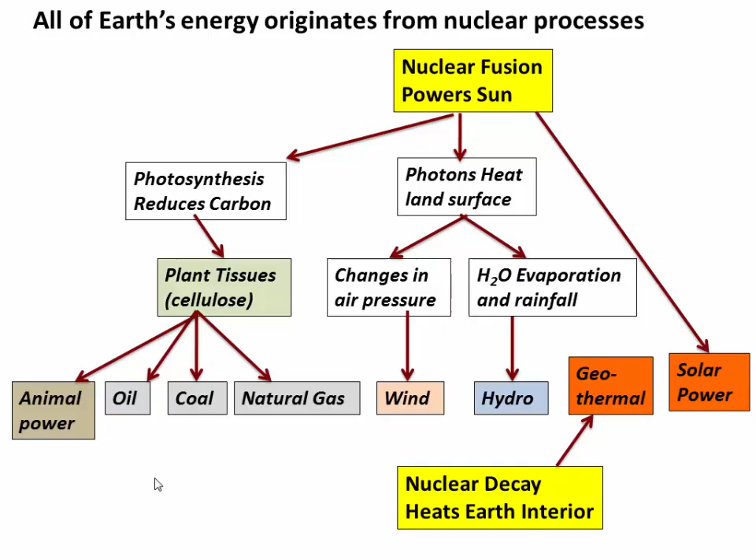So why not just harvest nuclear energy directly? Centuries of scientific research have given us the ability to make electricity directly from nuclear decay and nuclear fission. So why aren't we doing more of this? Well, let's look at the risks and the benefits. We'll go with risks first.

The big one is nuclear meltdowns, like the one that happened at Fukushima Daiichi in Japan in 2011. These meltdowns have the potential to spread radioactive elements around a large area and can be very difficult to clean up. In fact, Fukushima still hasn't been entirely cleaned up 7 years later. Likewise, nuclear energy generates waste, and that waste is long-lived and can present risks of leakage into groundwater, or those radioactive materials can fall into the hands of terrorists.

So there's definitely some risks, but I would argue that the benefits far outweigh the risks. Imagine a limitless source of carbon-free energy. Instead of burning coal and churning CO2 into the atmosphere, we're making electricity without burning anything, no CO2. And we're making a lot of electricity.

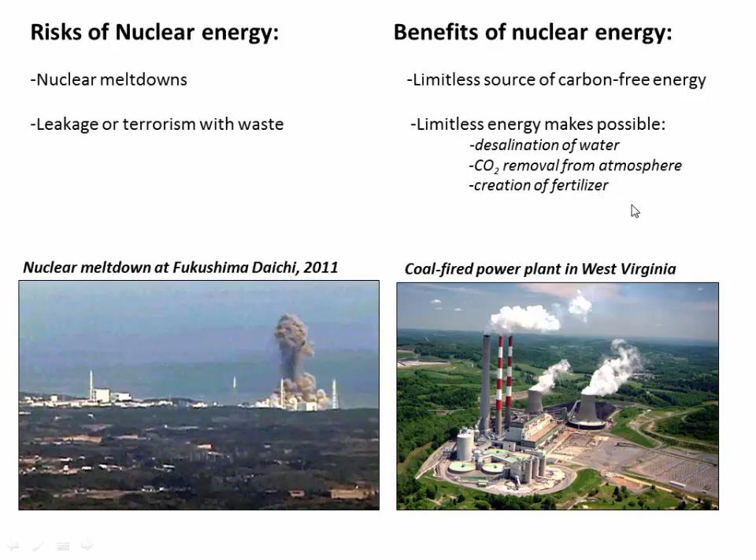A single nuclear power plant, for example, the one that was recently decommissioned in Vermont, makes the equivalent of roughly 700 large wind turbines or roughly 1.3 million solar trackers. So a nuclear power plant is a big deal. And if we have this much energy, we can do anything. We can desalinate water. We can remove CO2 from the atmosphere. We can create unlimited amounts of fertilizer to grow food. That's why I'm convinced the future of humanity lies in nuclear energy.

So in this video, I want to educate you a bit. What is nuclear fission that drives this process? What are the elements of a conventional nuclear reactor? And then I want to finish by looking at an example of a nuclear meltdown to talk about what happened and how those risks might be mitigated going forward.

Another product of fission is additional neutrons, and this is really the key. These additional neutrons go on to drive subsequent fission reactions in other atoms of uranium. And this is where the idea of a nuclear chain reaction comes in. As long as each fission event makes multiple neutrons, we can actually spread those neutrons around and they can each go on to induce more fission, and we can get a chain reaction and produce a lot of energy. So that's the basis for how most energy is produced.

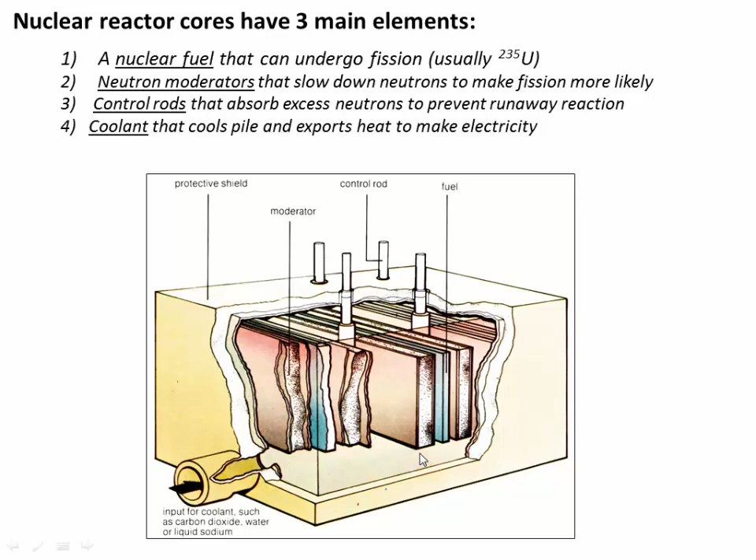Then we need control rods. These are going to be materials that can absorb a lot of extra neutrons to prevent a runaway chain reaction, much like we might see in a nuclear bomb. And finally, we need coolant. We need some kind of fluid, either water or salt, that's going to come through the reactor core and extract heat, and that heat can be used to make electricity. So let's look at each of these in turn.

We'll start with the fuel. We'll focus on uranium, acknowledging there are many other fuels, but uranium is the most common. Natural uranium is a mixture of two isotopes. So isotopes are versions of the same element that are chemically identical but have more or less neutrons in the nucleus. So for uranium, uranium-238 has 3 additional neutrons relative to uranium-235. Okay, so 2 different versions.

Uranium-238 is much more common. About 99% of natural uranium is uranium-238, and less than 1% is 235. However, uranium-235 is the fissile element. It's the one that fissions most easily. And 238 almost doesn't fission at all.

And this is measured by a concept called the fission cross-section, which essentially is the probability an element will fission if it encounters a neutron. Okay? So 235 has a very large fission cross-section, 238 has a small one.

So we're left with this problem. If we want to make nuclear energy, we need to enrich uranium into just the 235 isotope, just the lighter isotope. And how can we do that? How can we enrich uranium-235 relative to 238? Well, the first place to start is, where does natural uranium come from?

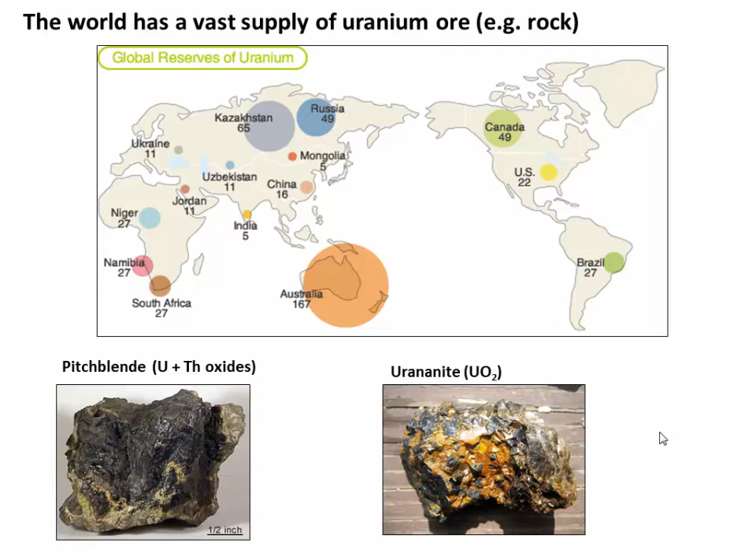But how do we get it from its form in a rock into some enriched uranium-235? This is typically done with a centrifuge process, where essentially the uranium is turned into a uranium hexafluoride gas. It's put into a centrifuge such that the spinning of the centrifuge causes the heavier 238 uranium to go to the outside, and the lighter 235 uranium stays on the inside.

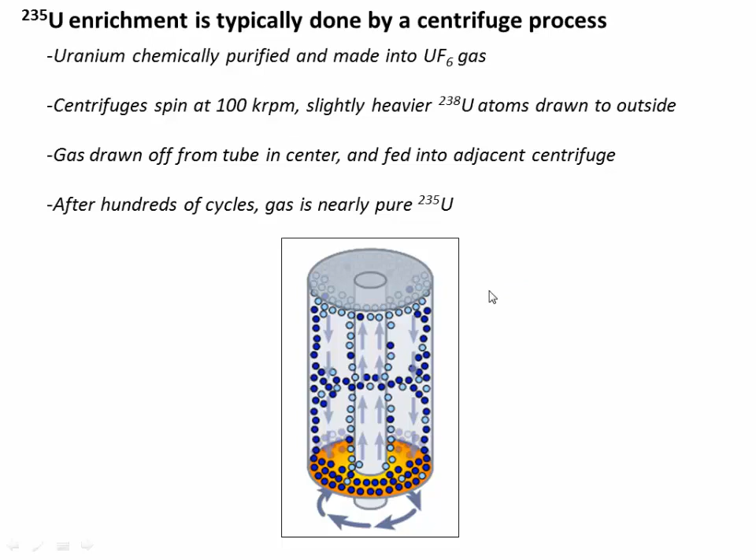We then draw off the uranium-235 through this central tube, and that gas is now relatively enriched in 235. We pass it into an adjacent centrifuge where the cycle is repeated. And if you pass it through hundreds or thousands of centrifuges, you eventually get a uranium hexafluoride gas that is relatively enriched in the lighter isotope of uranium-235.

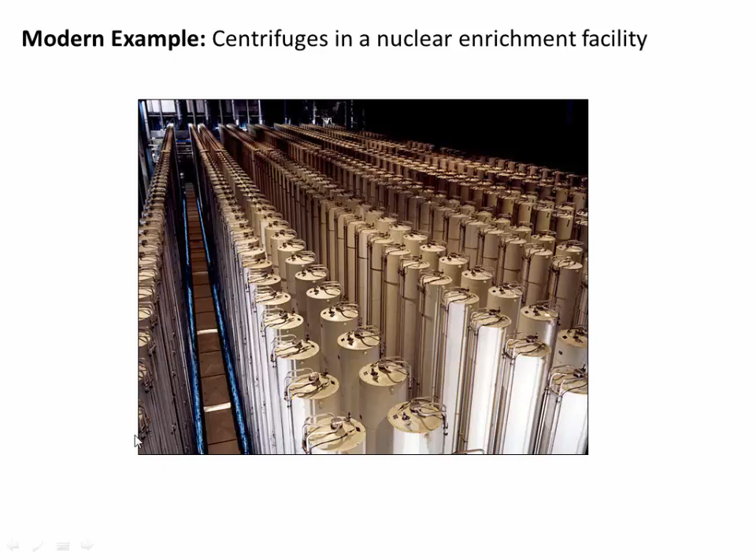And it turns out that this centrifuge process is non-trivial. And for many countries that are seeking to develop nuclear programs, this is the biggest stumbling block. For example, Iran. So now that you understand something about how the 235 uranium fuel is enriched, let's look at the moderator. How do we slow the neutrons down so they can drive fission more effectively?

And we do that essentially by bouncing the neutrons around off of other nuclei that have a very low mass. For example, hydrogen or deuterium. So here's how that works. Fast neutrons come out of fission and they get bounced around, for example, in a moderator made of deuterium. Each time they collide, they dump some of their energy in an elastic collision, and eventually they come out as a slow neutron.

Now there's two properties that make deuterium a good moderator. One is that it's small, so it can actually exchange a lot of energy with the small neutron. Really large elements essentially act like brick walls where the neutron just bounces off without dumping any energy. So that's one thing. The second thing is that deuterium has a very low absorption cross-section. It's not good at absorbing neutrons, okay?

A lot of other materials, like hydrogen, for example, are decent moderators. They exchange energy well, but they tend to also absorb neutrons. And that can really kill the neutron flux that we need in order to sustain a chain reaction. So the absorption cross-section really specifies how likely is an element to absorb a neutron without fissioning. That's the key thing.

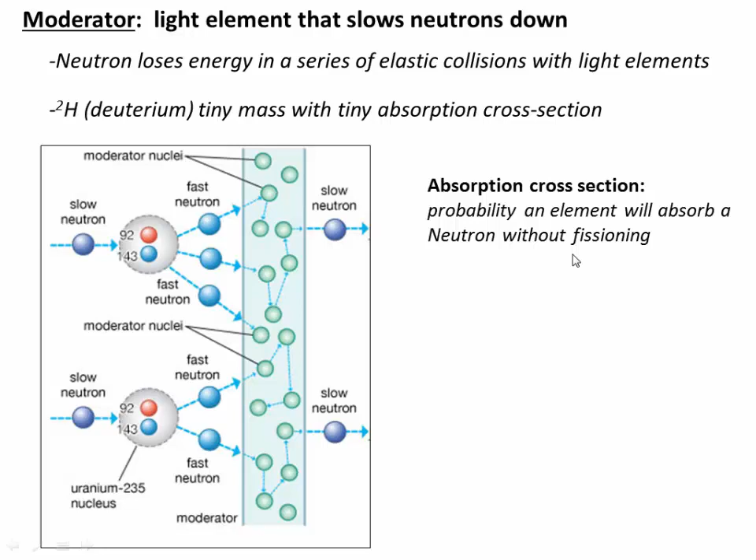So now let's look at control rods. Control rods are, in a sense, the opposite of the moderator, where we didn't want our moderator to absorb neutrons, so we wanted it to have a low absorption cross-section. We want our control rods to have a very high absorption cross-section.

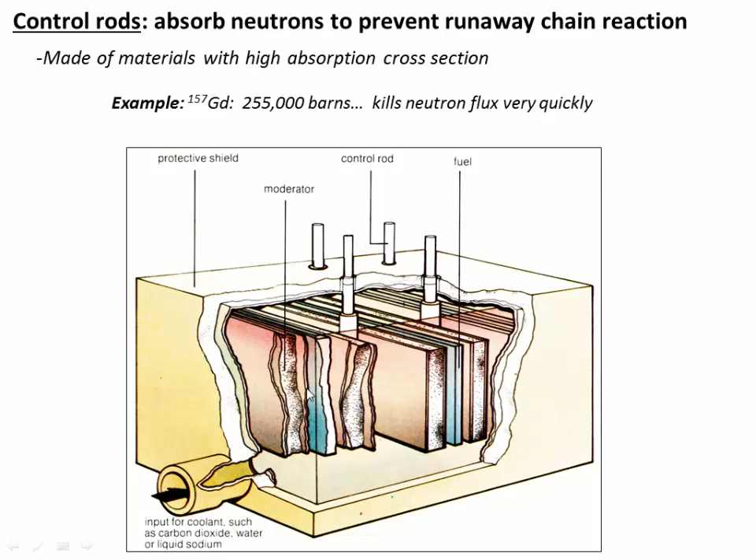These are the things that when we lower them into the nuclear core, they act like big sponges to suck up all of the extra neutrons and quickly kill that chain reaction, okay? So one example is gadolinium, which has a huge neutron absorption cross-section and can kill that neutron flux very quickly as soon as you slide those gadolinium control rods into the core. So finally, let's look at the coolant.

The coolant is the fluid that flows through the nuclear core. It's often water, but it can also be molten salt. And really all this does is heat up. All of this radioactive fission here is dumping a huge amount of heat, and the core gets very, very hot.

And so essentially the way we make electricity from this is we pass water or salt through it, which then exchanges heat. The water and salt gets hot, and then we use that hot water to make steam, which then drives a steam turbine, which spins an electromagnet and makes electricity, okay? So we're just using heat to make steam to make electricity.

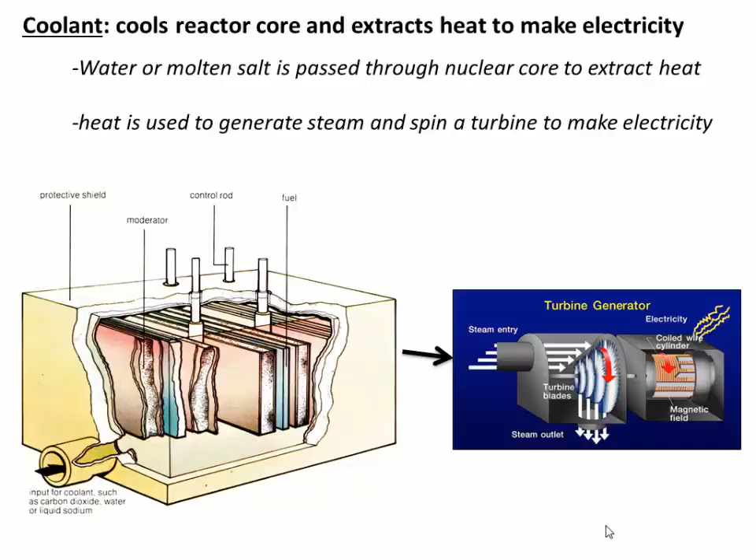So now that you know something about how nuclear energy works, let's take a look at the Fukushima Daiichi meltdown and think about how this could have been avoided. So this accident happened in Japan in 2011. And essentially we had a large nuclear power plant built right on the ocean. You may know that Japan sits on a subduction zone.

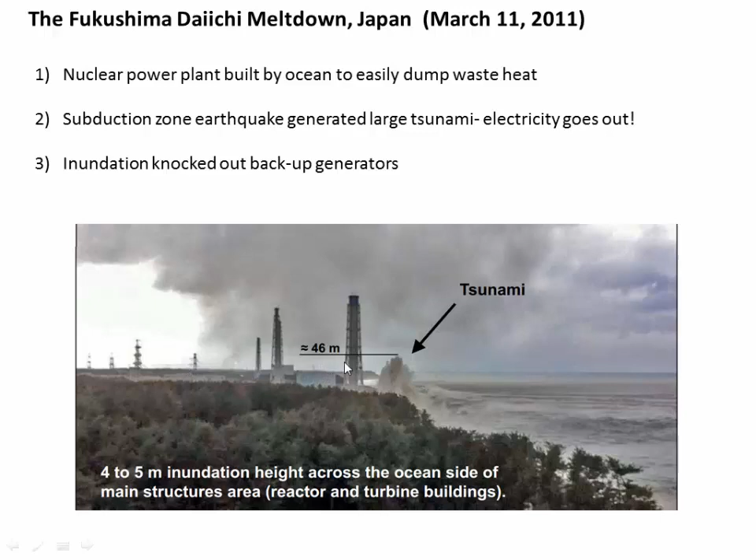There was a huge earthquake which generated a large tsunami. As those tsunami waves came and crashed on shore, they inundated the power plant. So at this point, electricity had been knocked out by the earthquake, and inundation of the power plant by ocean water essentially knocked out the backup generators. So this huge nuclear plant was left with zero electricity.

What happened then? The control rods are designed to go back in without electricity. So that was no problem. The rods went back in, fission was killed. However, the nuclear core has so many radioactive fission products that those continue to decay and generate heat even once the fission reaction has stopped. So the core continues to heat up, and it's essential that the core be cooled to avoid a meltdown.

Unfortunately, with the electricity being out, power to the coolant pump was lost. However, redundant engineering suggests that these coolant loops should continue to circulate steam and water just based on the pressure of the steam and the hot water itself, okay? It should be a closed loop, and that water should continue to flow through the core even without electricity.

Unfortunately, the large earthquake had cracked the containment structure and had essentially allowed this steam pressure in the coolant loop to escape. As the pressure was lost, the coolant water stopped flowing, and eventually two things happened. One, the core overheated and melted the nuclear fuel. Okay, once cooling was lost, the temperature kept rising and it melted down.

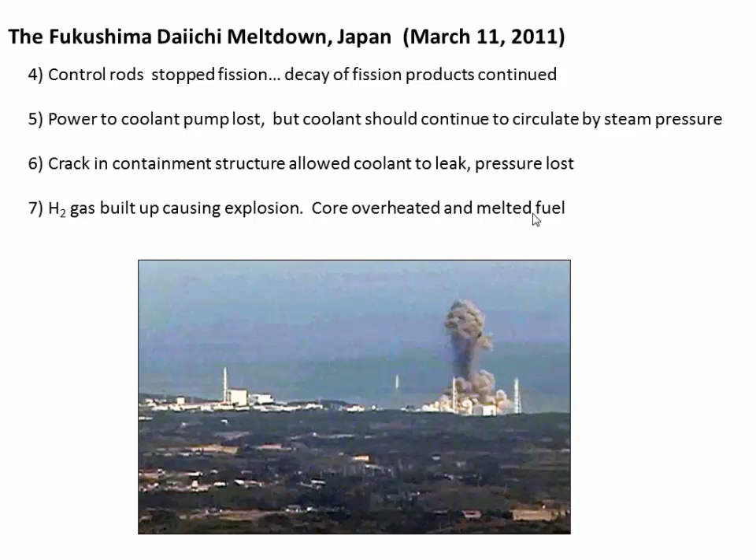And it's worth asking the question, what does the future of nuclear energy look like? How could we prevent these kind of accidents in the future? And how could we have the public regain trust in nuclear energy? Well, one thing on the future horizon is a lot of companies are looking into new designs that will improve safety and efficiency over these 50-year-old reactors.

For example, one is a molten salt reactor, which uses a liquid fuel, such that if power goes out, the fuel actually naturally dissipates over into a larger area and is able to get rid of its heat without melting down. Other designs use small modular reactors that are designed to be small and avoid these meltdown kind of accidents. We don't have time to go into these today, but I really urge you to go on your own and research some of these new designs that will improve safety and efficiency going forward.

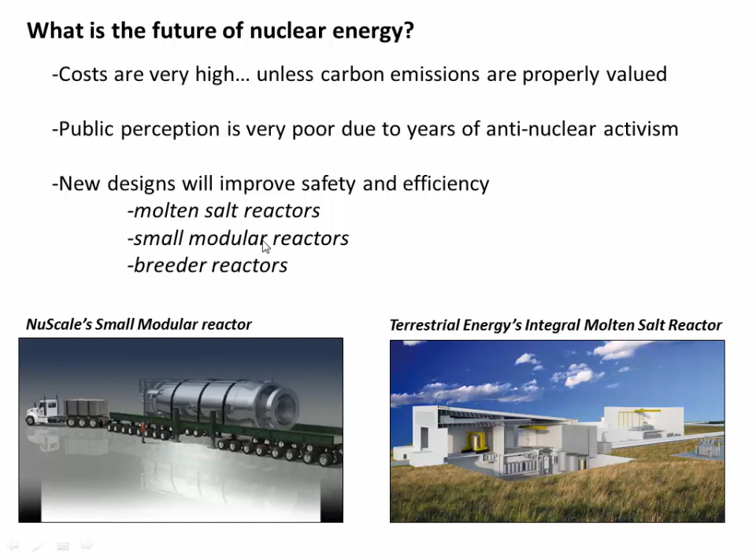So in summary, nuclear energy produces vast quantities of carbon-free energy. And it does that mostly by nuclear fission, which occurs when an atom absorbs a neutron and splits, releasing a lot of energy in the process. Most conventional reactors have four components: a fuel, a moderator to slow down neutrons, a control rod to absorb excess neutrons, and a coolant to take off heat and use that heat to make electricity.

Historically, one of the biggest challenges of having nuclear energy is learning to enrich that uranium-235 fuel and isolate that isotope that actually can undergo fission. And what did we learn from the Fukushima Daiichi accident? That a number of possible engineering solutions can make nuclear energy safer, and a lot of next generation designs may also have something to offer.